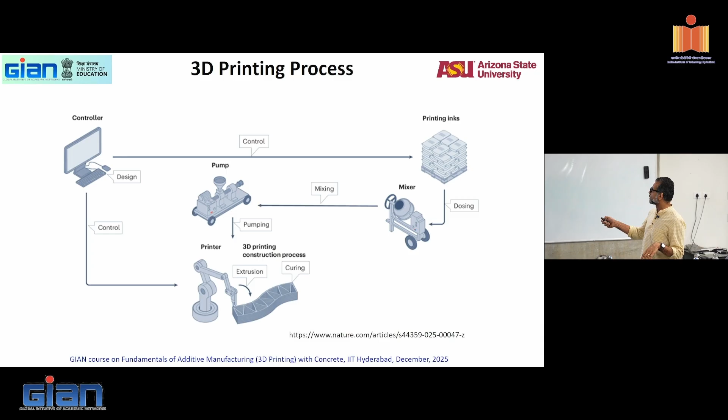We're going to do multiple things. Going back to printing, if you've forgotten what that is from yesterday: you have a pump that pumps the concrete into the printer, and then you print it in whatever shape you want, or you have a mixer and can directly put it in the printer. You can pump it whichever way using any of those materials. This is your basic process, and you can do all these different shapes, structural and otherwise.

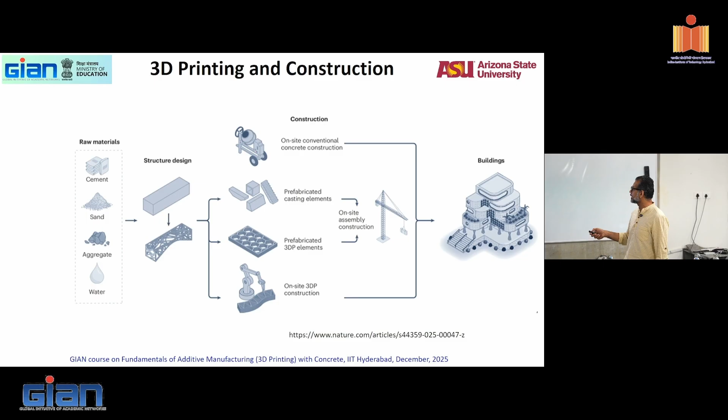So this is what we have in our plan of action. What do we need now? When you have a mixture that you need to print, and you're printing through a nozzle, continuously printing a large amount of material, you need to pump your concrete through a pump to the nozzle, correct? You have to get to the nozzle.

So your mix has to be pumpable. When the mix comes to the nozzle, it has to be extrudable through the nozzle, right? And once it is extruded, you have to be able to build it up, correct?

In your regular concrete, was it pumpable? Yeah, it's kind of pumpable. What do I do if it's not really pumpable the way I want? I add a little bit of admixture, a little bit of water, that's fine, I make it pumpable. It's not really flowing - what do I do? I get my vibrator, vibrate the whole thing. I just want to fill the form.

You have multiple levers that you can play. Your tolerances, your room for error, is much higher. Right now, you have zero room for error. You are playing this coordinated dance sequence, like the dance sequences where all the dancers do it together, otherwise it looks very ugly. Same thing - the pumpability dancer will have to coordinate with the extrudability dancer and the buildability dancer to effectively get what you want. And this has to be coordinated.

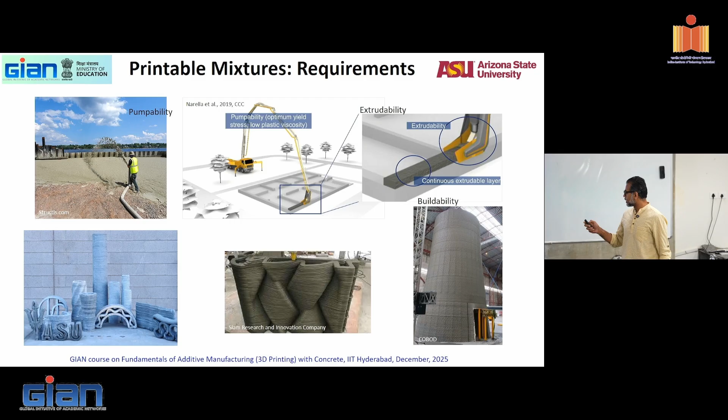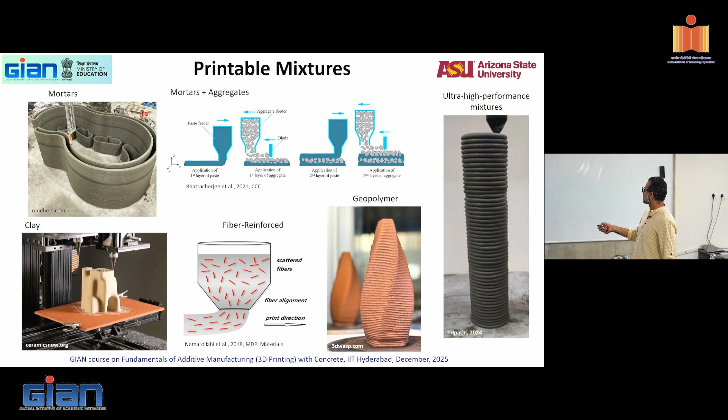Printable mixes, we talked about that - you need to be able to print them up and build it. I talked about mortars plus aggregates, the pre-placed aggregate concrete concept where you can build up things like this, all these shapes, in whatever fashion you want depending on what materials you have. So here are a few things connecting everything. Pay close attention to this slide - from whatever Dr. KBL told this morning, plus what we heard yesterday, a lot of things will come together in one slide, and we'll go in different directions as we go through it.

What we want is for things to be built up - eventually, that's your aim. If I want a 1 meter column, I need to be able to build that up. Here is your extrusion process, assuming you have a pumpable mix and have done all of that. You have an extrusion process, you want a certain viscosity, you know what the shear rate is - shear rate comes from pumping, and then the extrusion at the tip of the nozzle. You know what that value is, hopefully from a good estimate made in your laboratory experiments. Does that make sense? Is that idea clear to all of you?

Once having done that, what do I want - to get it built up in time. With time, I want the stiffness to increase, not the strength. Of course, as stiffness increases, strength increases too, but we don't want to characterize strength, because at early ages you can't calculate a strength. People will say, oh, this is a green strength - yeah, for lack of anything else, and strength is what we love so much. Yes, it's okay, but what we actually want is stiffness, because remember, in solid mechanics, there are only two fundamental material properties: stiffness and Poisson's ratio.

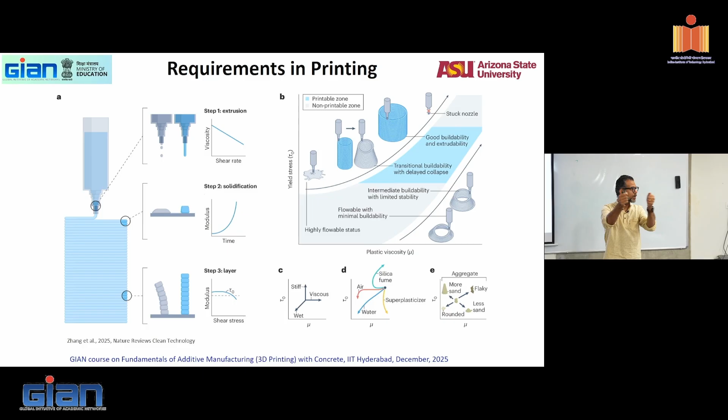By spreading these particles farther apart, what are they doing? These two cement paste particles are sitting like this. Superplasticizers, because of this phenomenon called steric hindrance - some of you would have heard in your classes - steric hindrance simply breaks this apart. They just go away, which means the contacts are broken. When the contacts are broken, yield stress comes down because you've broken the network. That's all you have done.

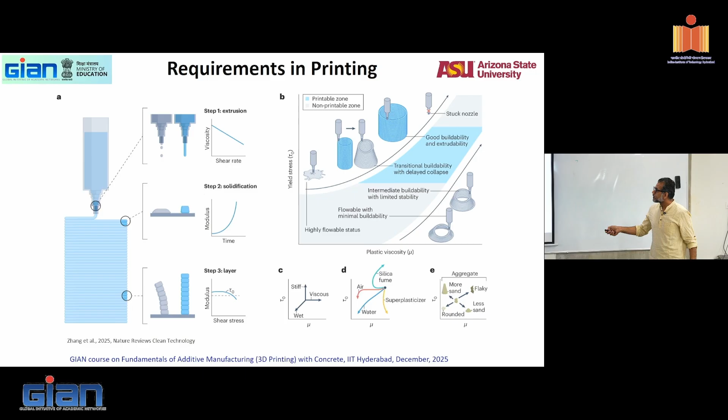Silica fume - now you add silica fume, what happens? Why am I doing this? For a certain dosage, you might see viscosity dropping a little bit. You will see the flow becoming easier because silica fume particles accelerate the flow at a very low dose of 1%, 2%. But when you get to 3, 4, 5%, they do the opposite effect - they start to collect these particles together and clump, and you will need more admixture. So depending on what you want with yield stress, you can play around with silica fume.

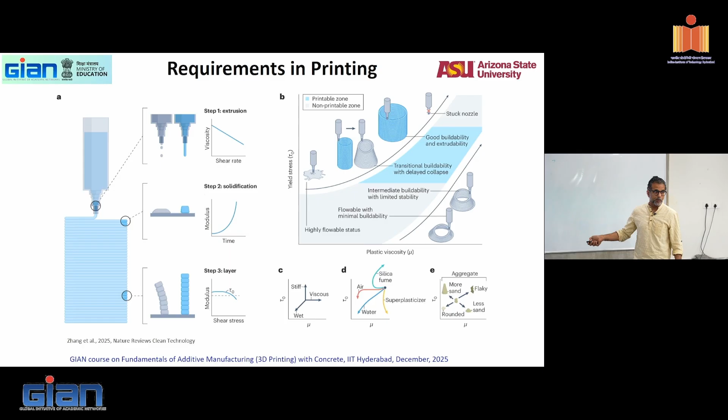Water, of course, you don't want to do this, but that's what water will do. You don't want to add extra water for all the reasons that you know.

And of course, aggregates, depending on what you have, does all of this.

So what is printability? Printability is extrudability plus buildability. You should be able to extrude through the nozzle and build up layer by layer. What do we need for that? Everything we talked about earlier: you need the paste to have the ideal yield stress and plastic viscosity. You need the aggregates, if you have them, to be spaced and particles packed in such a fashion that you give stiffness to the system, and then you should be able to print it and build it up well.

We talked about coating thickness when we talked about paste thickness. You can find the coating thickness based on simple fluid mechanics equations that use viscosity, density, particle sizes, and velocity of flow. You can find the ideal coating thickness for different applications. We'll work on that a little later.

Now, to get a good yield stress and plastic viscosity so the mix will flow, you want a certain amount of paste coating the aggregates, right? And that's what you heard in the morning. Your codes will do all of that empirically, by specifying the minimum cement content for workability and a minimum or maximum water cement ratio - they are simply specifying a certain paste volume. Depending on your aggregate sizes, you can find out, based on surface area, what the thickness of the paste is.

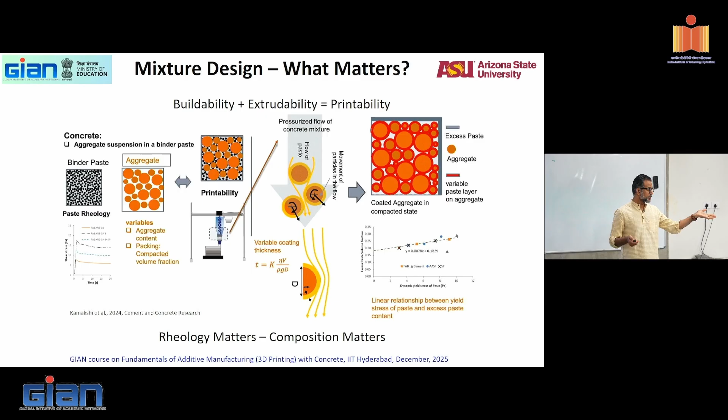So what you're doing is finding paste thickness, and here is a relationship between yield stress and the excess paste volume. As the excess paste volume increases, as you increase the dynamic yield stress of the paste, that is an indication that you have excess paste volume. So again, mix design will have to account for how much paste volume you have in excess of what you want to coat the surface of the aggregates. Because any excess paste is wasted opportunity, wasted resources, wasted money. So if you want mix optimization, that's what you do.

Okay, we talked about conflicting demands of stiffness and flowability. Again, stiffness or modulus - you want the modulus to be higher and developing fast so you can build up your layers and build the structure faster. One of the biggest advantages of 3D printing, if you look at people touting this technology, is that you can do very fast construction, correct? If you want fast construction, you better build things up fast. And if you want better buildability, you want the material to develop its stiffness faster - not while it's sitting in the mixer and the nozzle, but after it has come out of the extruder. So that's what you want. But in the extruder, you want better flowability so you can get a cohesive mix coming out.

So this one that you see here is good - this one, very good. It's very nice and pumpable. But what happens with buildability? Nothing. It's extrudable, it beautifully, nicely extrudes. You'll be very happy to extrude it. But then if somebody wants a specific shape, you'll say, whatever shape comes out is the shape you should buy. That's probably not going to work. This one is fairly good - you can do whatever you want.

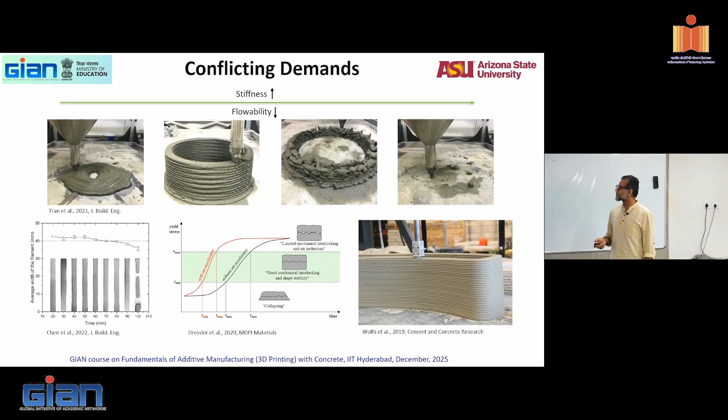This one, lots of people are putting in effort and struggling to get it out in some fashion. Finally, if you give the product something like this, of course you've lost your money. And this one, of course, it's not even extruding - it extrudes whenever the extruder thinks it wants to. You're not getting continuous extrusion. So you have the whole variety of this, and if this is what you want, this is probably that conflicting stiffness and flowability demand you want to satisfy.

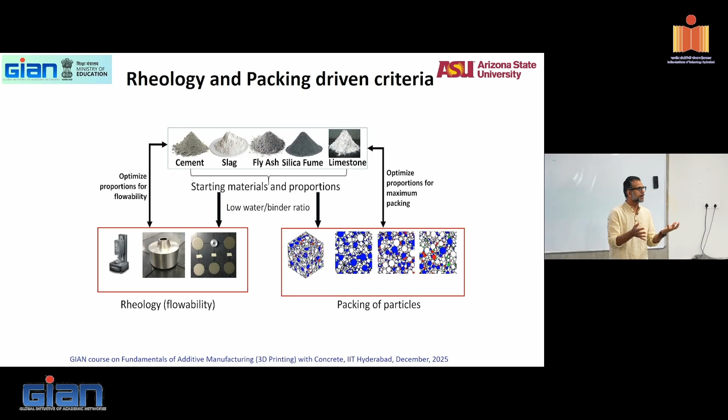Okay, so how does rheology and packing build into all of this? In the evening session today, we'll do a demonstration and you'll be able to play around with a few things. We'll do packing. The software isn't as complete as I'd have wanted, but it's in a shape where you can actually pack particles and visualize the packing. Avinay is going to give you data sheets with different size distributions that you can play around with and see how they pack. There are also calculations I'll show, which eventually these people have promised me they'll get this app working and running soon, and we will send it to you since all your emails are there.

We'll send it to you so that you can download it and play around and know all the particle packing characteristics. You can do all of that. Eventually, we hope we'll get you there.

So you have all these mixes, and all these materials have different size distributions. Cement, fly ash and limestone all have different particle size distributions. You can have different workability based on this. They'll have all different packing you can do. So you can optimize the proportions for maximum packing, optimize the proportions for the flowability and extrudability you want, and match these two requirements in some fashion.

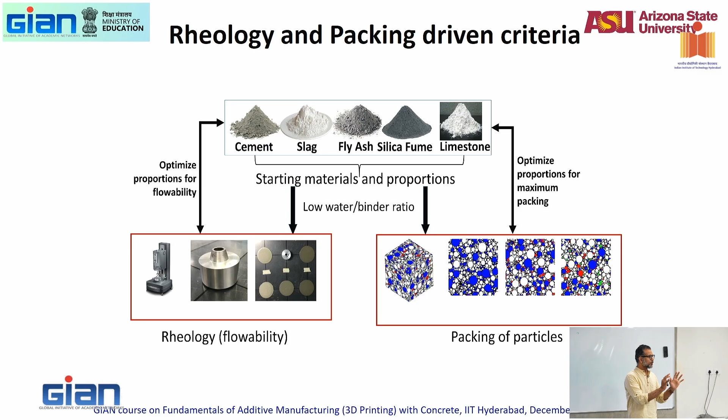We haven't really done it specifically for 3D printed mixes, but we have done it for UHPCs in a complete fashion and published to get rheology and packing based complete mixture design criteria, because UHPC's mixture design is more of a straightforward way of doing it compared to 3D printing, but the same principles will apply.

Now, binder type. If you want to start with packing, you talk about binders - what type of binders, right? So it'll be a good time to talk about binders you will use. Most of the time, your 3D printed concrete will have a high binder content - you're talking about 800 to 1,000 kilograms per meter cube of cement. Extremely high value. You don't really have to do that. You can drop it by 50% straight away. You can get to about 50% replacement of cement with some other materials if you know the way to control particle packing and rheology.

So a few things that'll be handy, and let's do some thought exercises here. I give you a bunch of different cement replacements. Let's assume you have all the cement replacement materials that you commonly have. And if I tell you, you can't change the water content in your mix, but I want the yield stress to be dropped - I want a lower yield stress, your water content has to be the same. I'm giving you cement, fly ash, silica fume, slag. What material will you use? Fly ash. Why?

Assuming that particle sizes are in the general range of cement, they're not extremely fine, not extremely coarse. Why fly ash? What will the shape do? Spherical shape, what will it do?

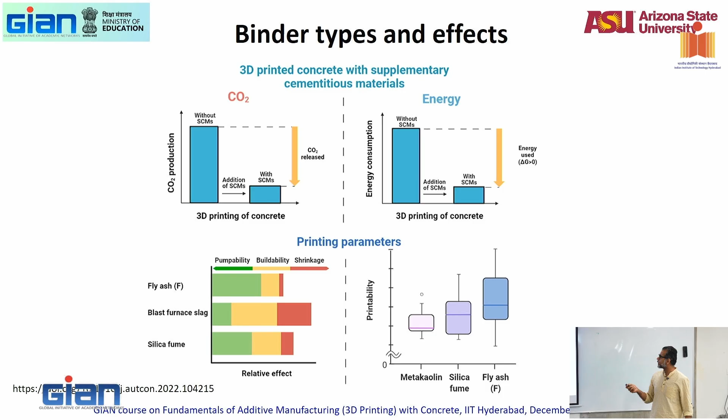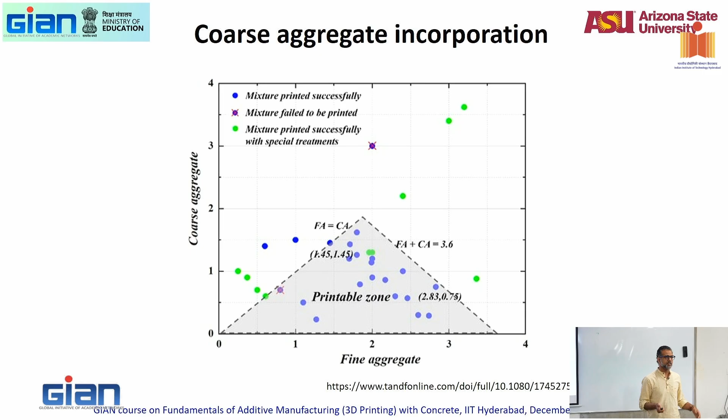So again, a few things to remember when you look at all those binder types. Now, coarse aggregate incorporation - you can incorporate coarse aggregates. When they say coarse aggregates, it's typically less than 10 millimeters. You're not talking about 1-inch aggregates, none of that - less than 9.5 mm aggregates. There's a certain zone in which you have a coarse to fine aggregate ratio that you can print, which is a function of your mix optimization, particle size, and all of that. You can look at that.

Now, if I'm really looking at particles, and this is more of a fundamental material science idea, what are the factors I have to look at when you pack particles? I'm sure you've seen in a basic material science class particle packing ideas - simple cube, body-centered cube, face-centered cube. A body-centered cube has a packing factor of 0.68. Face-centered cube has 0.74. Face-centered cube or hexagonal close packing, another form similar to face-centered cube, both have a packing ratio of 0.74, which means if I take a box and take same-size spheres and pack them in the form of hexagonal close packing or face-centered cube, I can pack 74% of the volume of the cube with these particles.

The remaining 26% will be empty. So if I have only spherical particles, which is what we idealize like you've seen in the morning, what do I need to increase my packing fraction? I need to add smaller particles. If you keep on adding smaller and smaller particles, you can get to 0.905 - that is the theoretical absolute maximum particle volume fraction you can get by packing these different size particles, but those are spherical particles.

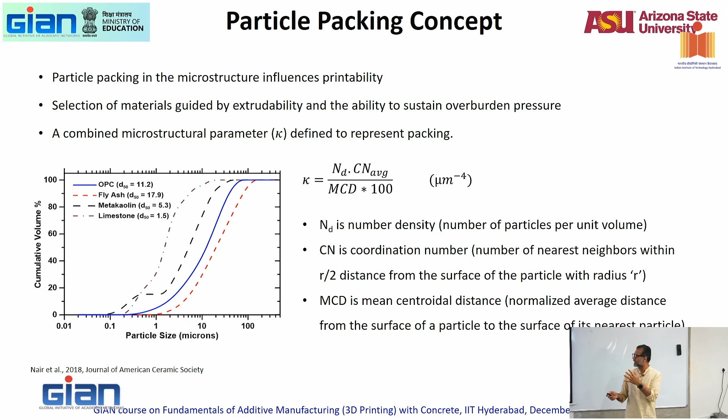So how do we distribute those particles? Mean centroidal distance is the distance from the surface of a particle to the surface of its nearest particle. Again, these are all mostly for hydration control, but we can use it for packing aspects as well.

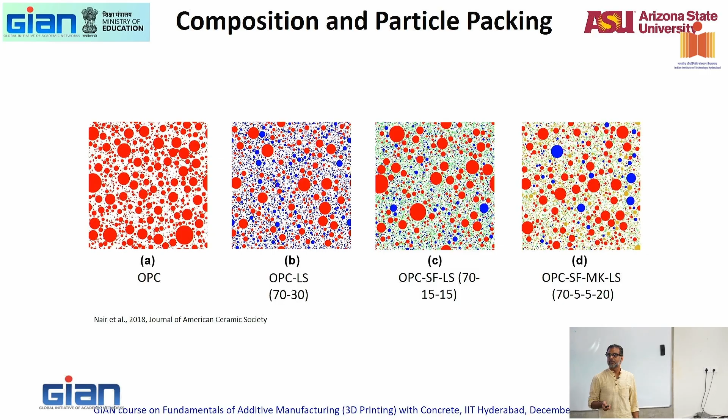It'll be cheaper, but think about 3D printing. When you're 3D printing a wall with extremely high exposed area with a large amount of cement, what are you going to get? Higher shrinkage cracking, correct? One of the most important problems with 3D printing is shrinkage cracking, which we will see later. So to control shrinkage cracking, your best possible option is to control the amount of cement, which means you have to fill it with some other particles, maintaining your extrudability and buildability at the same level.

And here is what's packing in a unit volume in 3 dimensions. You will see all of this in the evening, I hope.

Okay, now let's get to the aggregate story a little bit. And here is where I want you to understand this. You've seen this in the morning slide also. Here is packing density, here is the fraction of aggregates. Remember, in the morning presentation, what Shubhu showed, this graph was like this. You saw that?

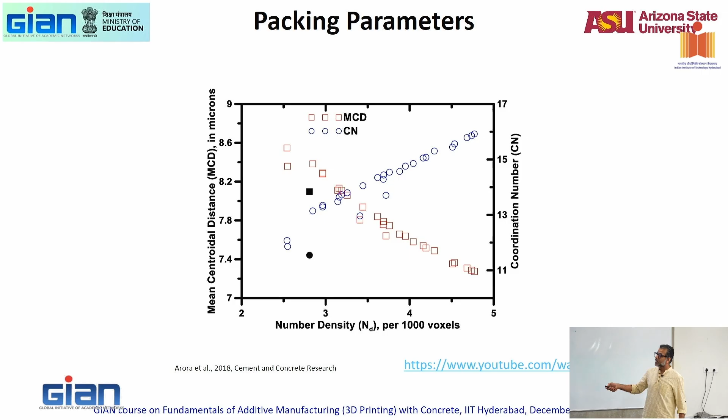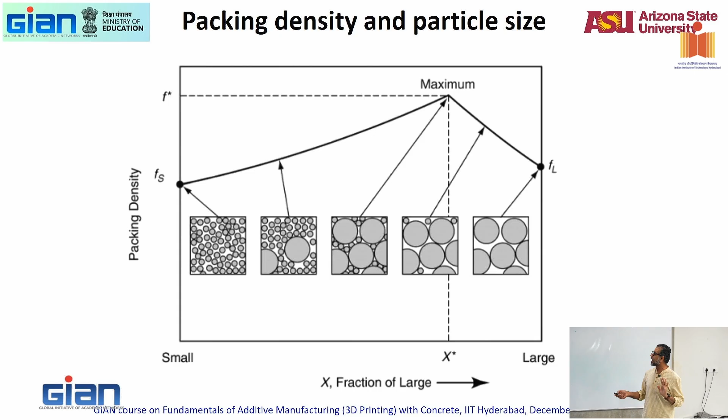This is packing density. What he was showing was a volume of voids, which is 1 minus packing density. So this graph was like this, and you said there was a minimum value where the voids are minimum. The same thing I'm saying, a minimum value where voids are minimum means there is a maximum value for packing density, for a certain combination of aggregates. How do you get that? That is the whole idea of doing packing.

Okay, so here are some packing parameters. We'll come back to that later. You've seen this picture earlier also in the morning, in a slightly different form.

So when I have all similar size particles with one particle trying to go in, it tries to loosen the system, right? If you try to put a certain amount of sand into aggregates, it's actually initially loosening it before you start to fill that back up. So there's something called the loosening effect, where a smaller particle goes in. This is the same thing that happens in crystals when you have defects.

It's called interstitial defects. For example, if you make steel from iron and carbon - carbon is an interstitial defect that goes into the crystal structure of iron and changes the crystal structure of iron. If you remember your steel phase diagram, you'll know that pure iron at room temperature has a body-centered cubic crystal structure.

If you simply heat pure iron to close to 900 degrees Celsius, BCC changes to an FCC structure. Simply by heating, your crystal structure changes. FCC has a higher packing than BCC. Now you heat even further, the atoms and particles rearrange, reorganize, and you get back a BCC structure, right? So lots of these metals do that through temperature changes.

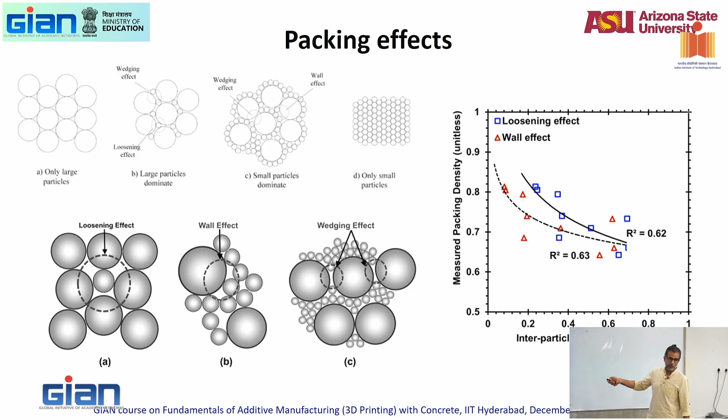As a function of interparticle interaction, loosening effect and wall effect create a reduction in particle density or packing density. This is what happens - again, these are all simulated values that we have done.

Remember this picture from yesterday? How does this relate now? This was viscosity as a function of volume fraction and sizes. Yesterday I told you we'd get back here when we talk about packing. So here it is as a function of sizes.

Smaller spheres give you larger viscosity. Larger spheres give you larger viscosity. Somewhere in the middle, you have lower viscosity, faster, easier flow. So it's not just one size that does it, it's a combination of sizes.

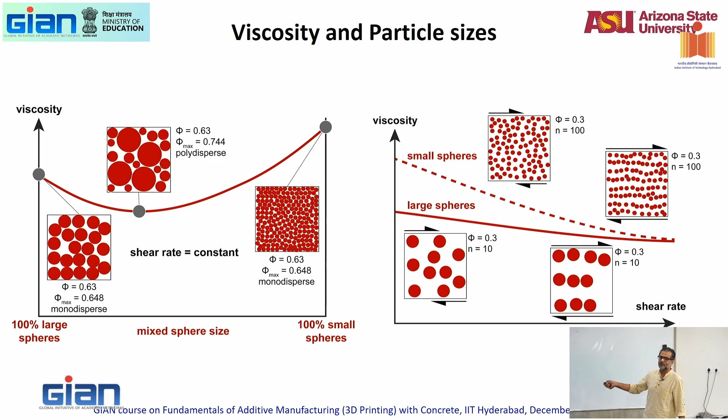Again, here we saw that when you increase the shear rate, you kind of take away the particle effect. I'll come back to this later. So I'll do this compressible packing model, very similar to the packing you heard about this morning. We are going to throw in a little bit more mathematics into it.

There are several different models for packing. You can have monodisperse, polydisperse. You can have packing based only on packing densities, or packing based on size and density - so many different varieties. But this is one kind of packing model that is computationally easier to implement.

That's why I do it, so that when I give you the app finally for particle packing, it'll have this model. What it does is take into account what's called a compaction index - a scalar number which depends on the size distribution of aggregates that facilitates better packing, and the effort involved in packing. Right now, packing particles doesn't come free, it comes at the expense of energy.

If you want to pack something more into a system, you have to give it energy, correct? You have to vibrate it, rod it, compact it - something. Just taking a bunch of particles and putting them in a volume, will it compact well? You have to vibrate it and let it go into the right spaces to fill it, correct? Same thing with concrete - you vibrate your concrete to get better density. So you need to provide energy. This K is an indication of both the distribution of particle sizes and the energy that you give.

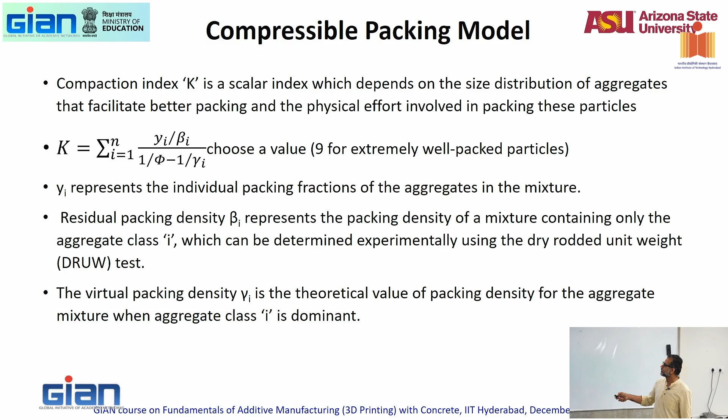And then you can use an optimization method, a Newton-Raphson method, for example, for those who have done a numerical methods class. You can use that to optimize and find the value of phi based on this. And then if you have fibers in it, your fibers will also perturb the volume. Fibers are long, they'll also try to move the materials farther apart. You can account for the perturbation volume. All of it said and done.

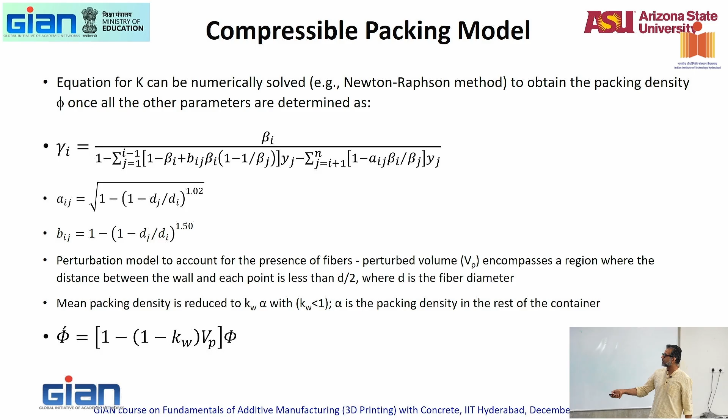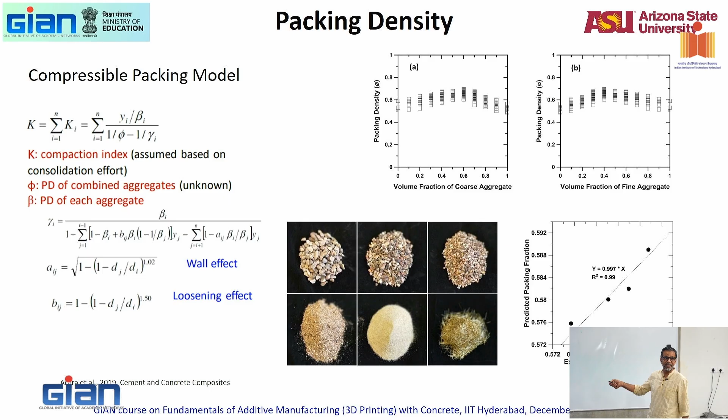Here, if I'm using these different aggregate sizes, 1, 2, 3, 4 different aggregates, sand, fibers, all of that, here is your simulated model. I'll eventually give you, I promise, in the next month, the software that will do all of this for you free. So this is taking the volume fraction of coarse aggregates and doing whatever fraction of, this is about 800 simulations of so many different combinations. No experiments, simply your software will do it.

And then I will do the theoretical packing density. You see, at about 0.6 volume fraction of coarse aggregate, I get my maximum packing density of aggregates, about 0.72 or so, which means I can make a system with 28% paste. That's your minimum paste content to pack the system. Similarly, for a different size distribution, my maximum volume fraction slightly changes. And then my experimental versus predicted shows that my model is good.

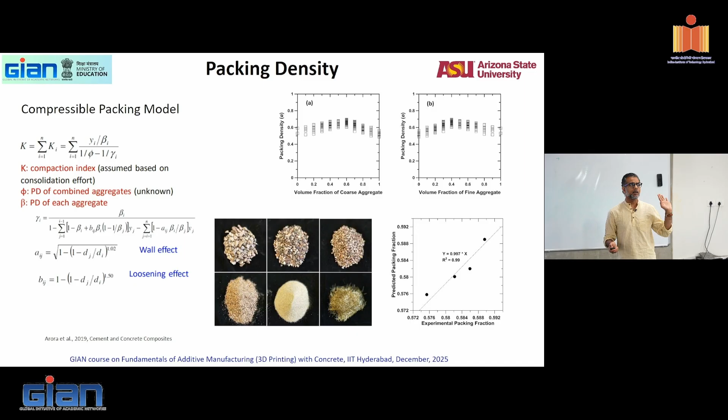So this is your packing density calculation using what's called the compressible packing model, exactly based on theory of how particles pack. And if I do some examples based on 3 different sizes, a fine, intermediate, and coarse aggregates, increasing packing density from 0.65 to 0.82. What does this point to? Among these, do you think which one will have a 0.82? Fine, intermediate, or coarse? Which one will have it?

Don't try to say an answer quickly. No answer is also a good answer sometimes - the idea is to identify at what point there's no answer. Among these values, 0.65 and 0.82, can I tell which is which? I don't know any other information, so I say coarse, intermediate, fine - one is very coarse, one is very fine, the other is in between. I can't say which is which, it could be either one. How many sieve ranges have I covered in the intermediate, correct?

Now likely you can make an educated guess and say this 0.82 consists of a larger size range - that you can say, correct? Because if it's only one size, I should be closer to 0.74, because I have a higher value that I experimentally determined. You can simply tell the guy he's wrong, but telling somebody he's wrong without proof is also not a good thing. But then you can say maybe that range has larger sizes included.

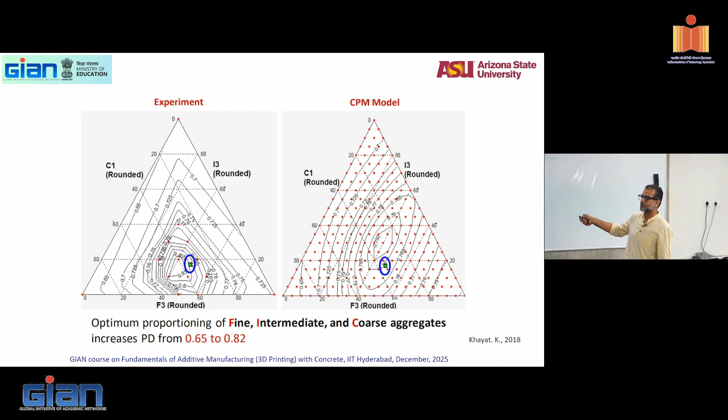You get the idea? So between 0.65 and 0.82, and I do a lot of simulations, a lot of experiments here, and I say that's my optimal value, which is 0.7... 0.80785 or something, and then 0.79 is what I get using the compressible packing model. So the model actually does pretty well for lots of different things.

All right, so that's the idea of particle packing, which we will come back to again when we talk about extrudability and buildability.

So continuing from where we left off, we're talking about packing effects, how that affects rheological properties, and how eventually - we haven't seen that yet - but how eventually we will see how all of this affects extrudability and buildability, which is basically your printability criteria.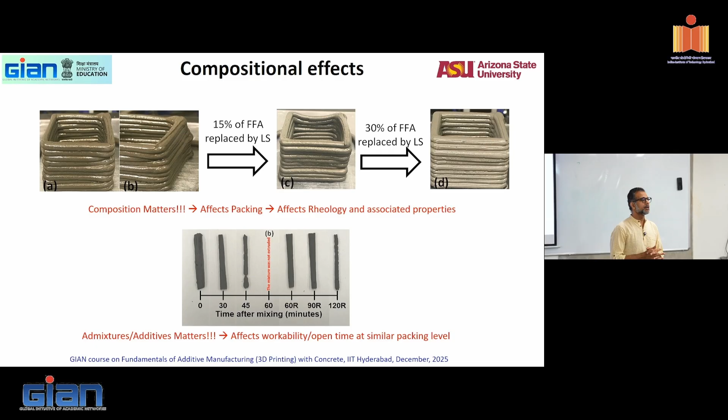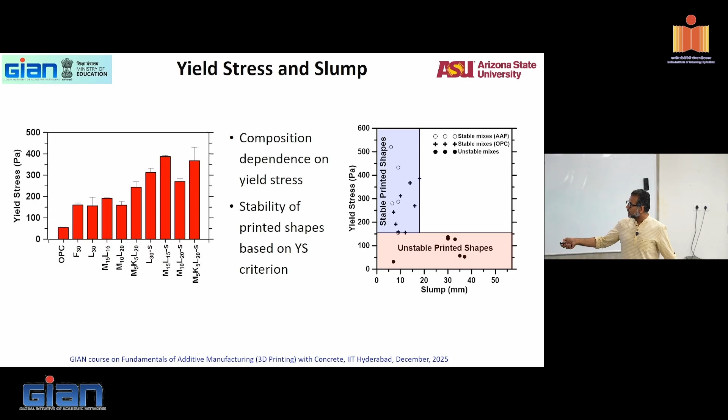Yield stress and slump, you heard this in the morning. Yield stress is an indicator, or slump is an indicator of yield stress. So for different materials, if you look at yield stress as you add more and more materials - many of the concepts we talked about, you can see here. If I add 30% limestone and replace cement with that, and limestone is much finer than cement, my yield stress increases. Why? The number of particle contacts have gone up.

As I go with smaller and smaller sizes, the number of particle contacts goes up, yield stress goes up. Similarly, everything on the right side of OPC here are systems where cement has been replaced with particles of smaller sizes. And then with metakaolin, you'll see the yield stress really going up. Why? Not just particle size effect, but also the effect of clay, which has the ability to hold onto the water and not allow water to the rest of the mix, so it becomes much stiffer. So with metakaolin, that's what you see.

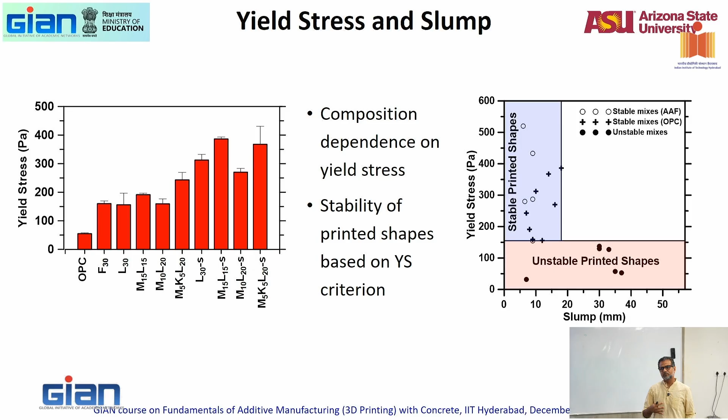With all these mixes, it's simply the effect of more number of particles, more particle contacts, more energy required to break the flocs, more stress required to break the flocs - that's what you're seeing. And then if you use yield stress as a very quick measure, and slump as a very quick measure of whether you can print or not, this is what you get. At very low yield stresses, you really can't print. But at lower slump values and higher yield stress, you get some stable printed shapes. Again, it's a trial and error way that you can get it, and you can relate yield stress to slump.

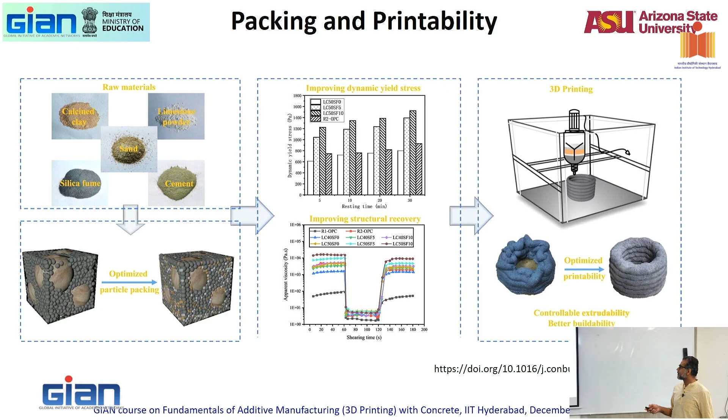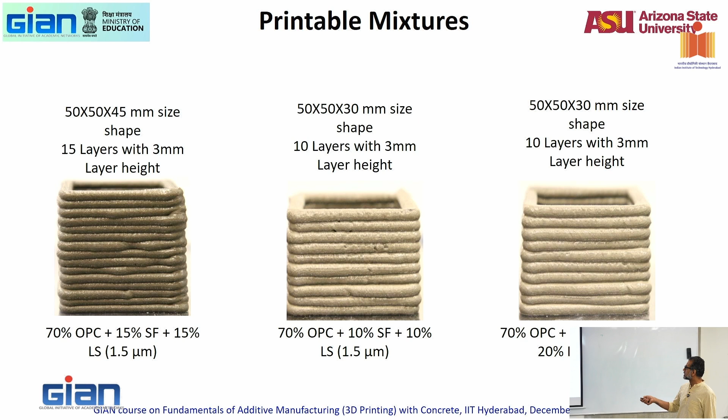Packing and printability, going back to the same idea - how do we now start to quantify packing and printability effects? So here are a few printable mixes, again the idea being OPC with some replacement materials to get better buildability, better shape stability, and all of that. There are now 3D printing systems called 2K systems. So 1K system is basically your pump and one extruder.

You extrude that one material. Now we have 2K systems that allow addition of accelerators or other admixtures just before the nozzle. Why do you need that? You want the material to be extrudable, so you want a low enough yield stress. But then you add an accelerating admixture at the tip of the extruder nozzle so that when it comes out, it quickly becomes buildable. The yield stress goes up because the accelerator speeds up cement hydration.

Remember, if I have two particles with cement grains in between, one way to increase yield stress is to accelerate hydration and form more hydrated products, replacing the water with hydrated products. For any unit volume of cement, after complete hydration you get roughly twice the volume. It's not hydrating completely here, but you see how the volume increases. That increased volume fills up the space, increases stiffness, and helps the material hold its shape much better. That's the benefit of adding an accelerator at the tip of the nozzle just before it comes out.

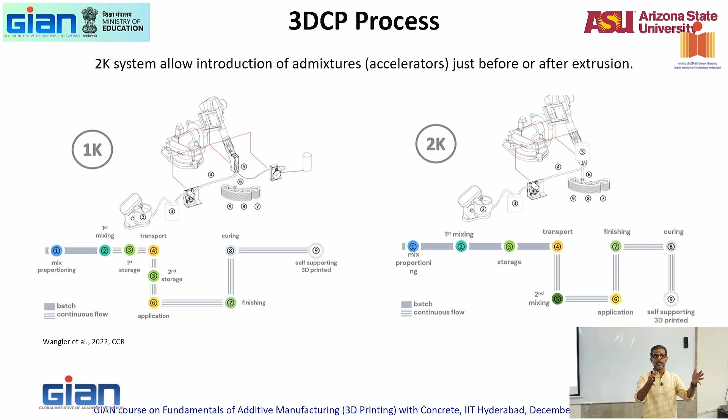You don't want to do it ahead of time. You don't want to do it while the material is within the extruder, because it'll get stuck in the extruder.

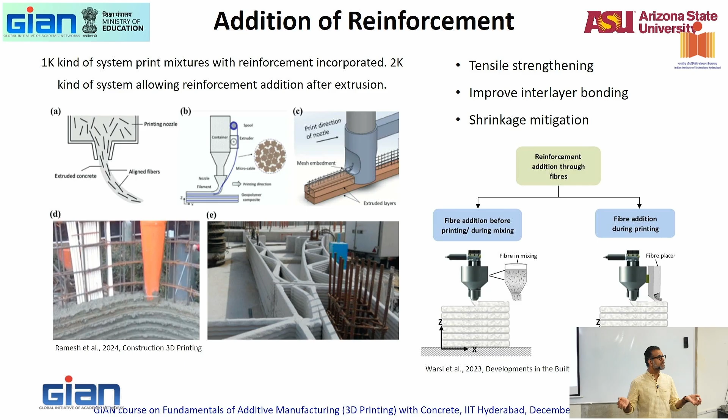Addition of reinforcement: material design for 3D printing has a lot to do with fiber reinforcement, not because we can't print without fibers - we absolutely can - but because we have no other really credible way of reinforcing this material. So is there a better way to build in some tensile strength to the printed material? That's why fibers are added.

If you look at a random shape of fibers added, as the material goes through, you see these fibers aligning along the direction of printing. So when you print a layer, you'll have short fibers aligned along the direction of printing.

Like we talked about yesterday, you're now getting an anisotropic composite material. The concrete does not have the same properties in all directions - depending on the direction of testing, your properties will be different. Not much difference in the compressive property with fibers, but with respect to tensile and flexural properties, which is something we need to think about.

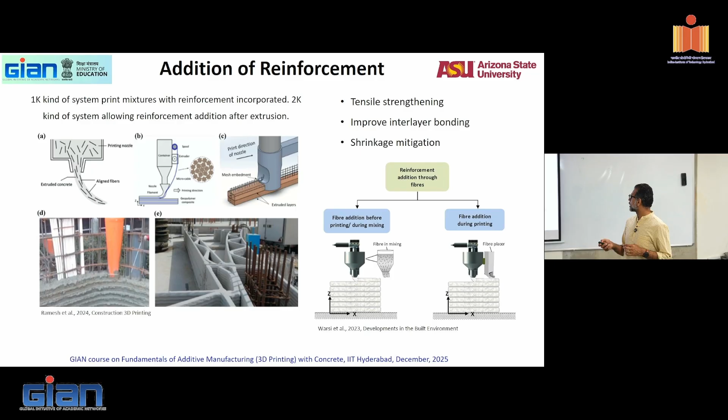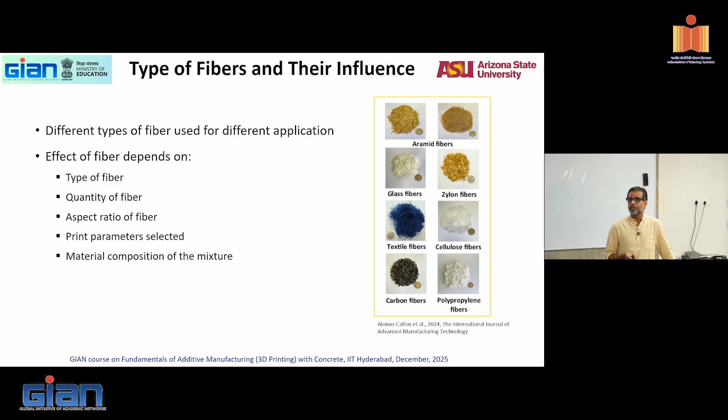There are many types of fibers you can use: aramid, glass, textile, cellulose, polypropylene, and more. The effect depends on the type of fiber, quantity of fiber, aspect ratio - which is length to the least lateral dimension of the fiber - the print parameters selected, such as how quickly you're printing and how many layers, and the material composition. We'll see more of this when we talk about mechanical properties, but fibers definitely influence the properties.

In the fresh state, fibers influence workability - all of you know that. When you add fibers, workability is influenced: it changes yield stress, cohesiveness, shrinkage, cracking, and surface finish. And if you have an improper mix design, you'll have settling of fibers, improper bond, or stiff mixtures where you simply can't print.

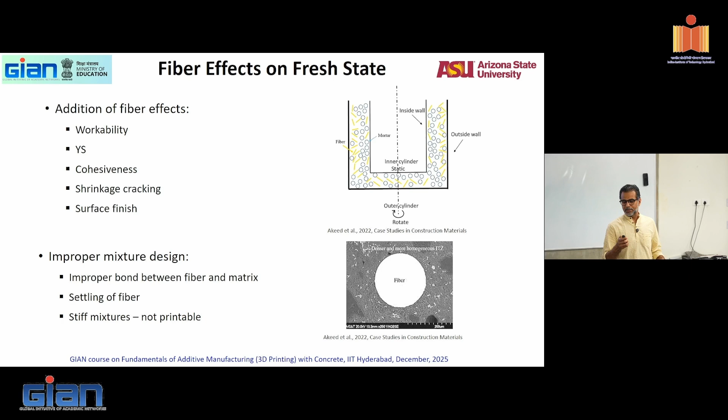Printing fiber reinforced mixes - just to give you a few examples. Remember the wall effect you saw with aggregates, where things get stuck onto the wall and create a different packing closer to the wall? Same thing happens here: you'll have fibers near the wall, and in between you'll have fibers randomly aligned, depending on the size and the effect.

As the material comes through the nozzle, if the fiber dimension is close to the size of the nozzle, you'll have aligned fibers. If the fiber is extremely small compared to the nozzle size, you'll still get random orientation. In regular concrete, when you throw in fibers, you rely on random orientation - you expect the fibers to be randomly oriented so the concrete gets properties equally in all three directions.

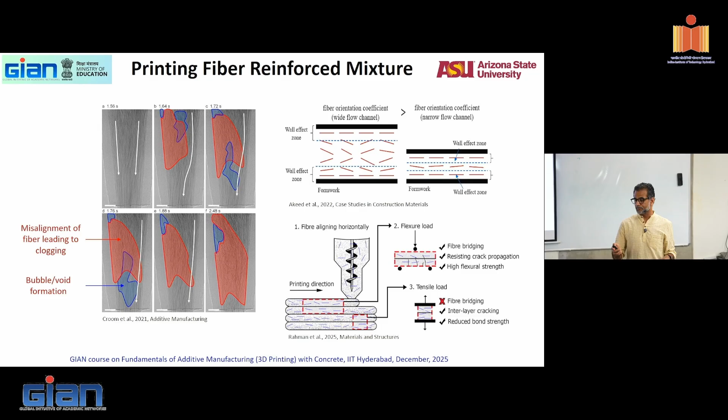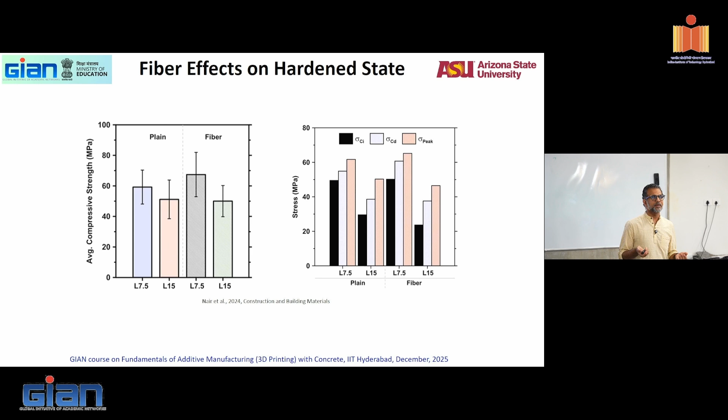So here are some examples of fiber effects on the hardened state - compressive strength, flexural strength, plain versus fiber reinforced. In compression, fibers really don't do much at small volumes. At very high volumes, as in UHPCs (ultra high performance concretes), where up to 3% by volume of fibers are used, you start to see an increase in strength. At about 0.3%, you'll see almost no effect in compression, but you will see effects in tension and flexure.

Steel fibers have better tensile properties, so they'll be better. If you want crack reduction or load control, polypropylene is perhaps good. Aramid fibers are also very good, very stiff fibers, but they're much more expensive. Steel is perhaps the best and most commonly used.

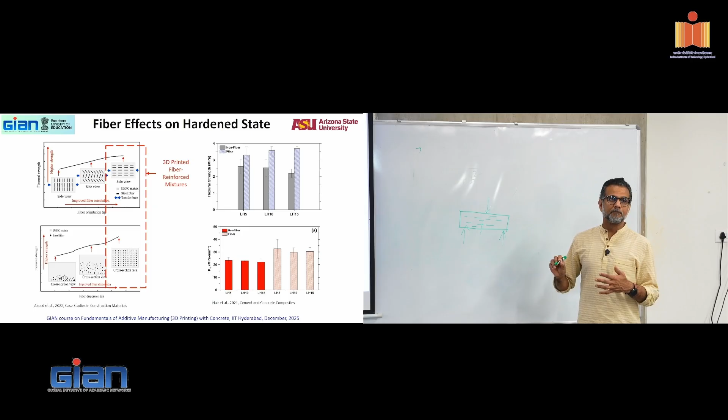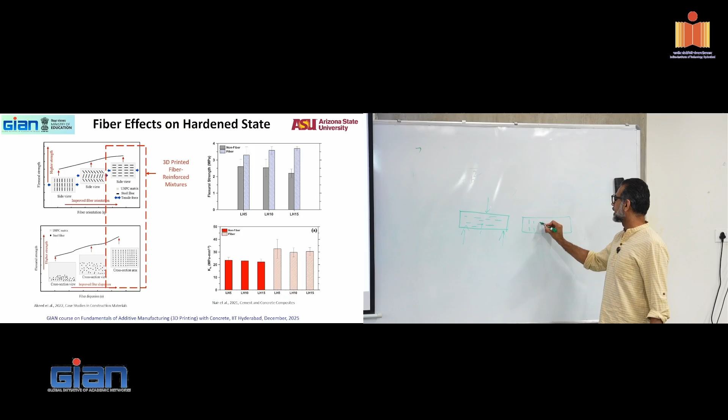So for flexure, if you have a beam that you're testing, and if your fibers are all aligned in this direction, a crack going in this direction will find a fiber, and you'll see all the effects associated with fibers: crack bridging, crack deflection, and therefore the toughness and flexural strength will increase. Whereas if you print it so that fibers are aligned like this, a crack can go right through, and you might not see any influence of fibers at all.

If you have normal casting of concrete, you expect the fibers to be in all different orientations, which means statistically there's a chance of finding a fiber everywhere, and that's why the properties are increased. In this case, the properties are much more increased because you're absolutely certain to find a fiber on the crack path if fibers are aligned in that direction.

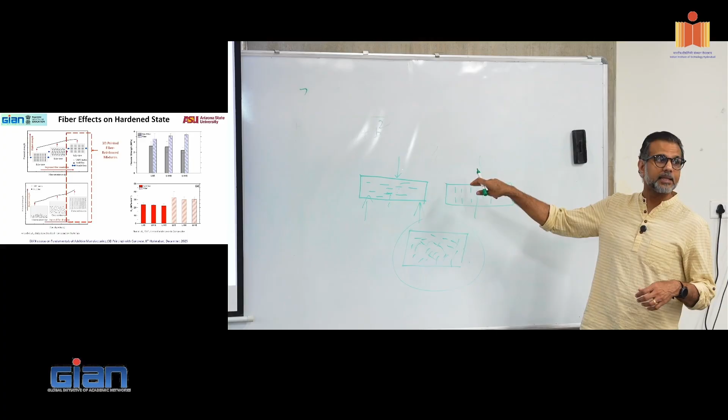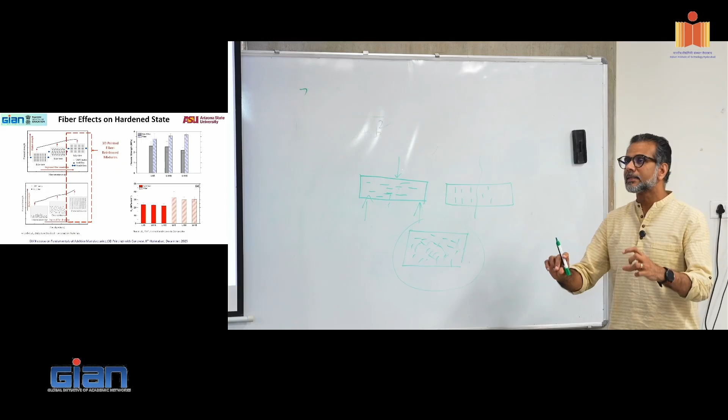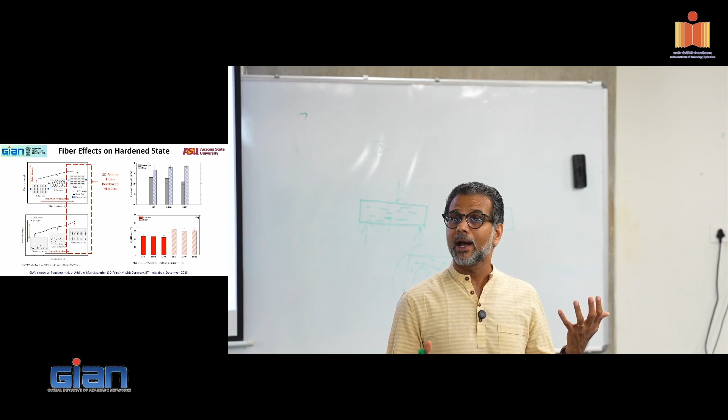So everybody gets the difference, right? Printing direction matters - how you print, what direction you print, matters with respect to testing. Now if you print a slab and cut a piece of beam to test, the direction of testing matters. So when you say you got so and so flexural strength using fibers in your 3D printed mixture, you have to specify absolutely what was the direction of testing.

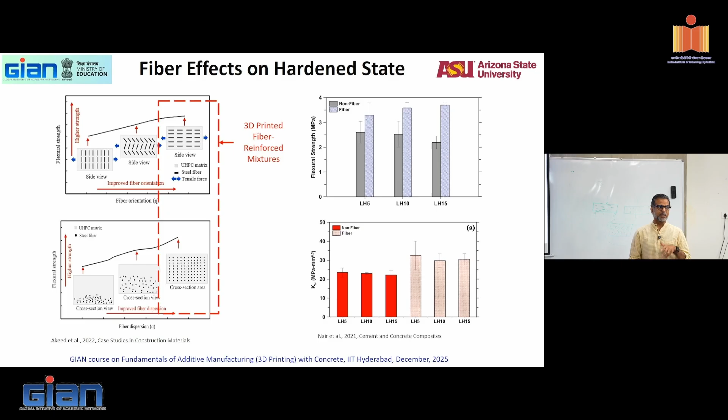Because you're dealing with an anisotropic composite. Anyone who has taken continuum mechanics or stress analysis will know that your stress tensor will have 9 components - we simplify to 3. If you have x, y, z directions and sigma 1, sigma 2, sigma 3, now you'll have components 1-1, 1-2, 1-3, 2-1, 2-2, and so on - all 9 components. Make sure that's accounted for. You can remove a few because they'll be similar, but generally it's what's called an anisotropic composite.

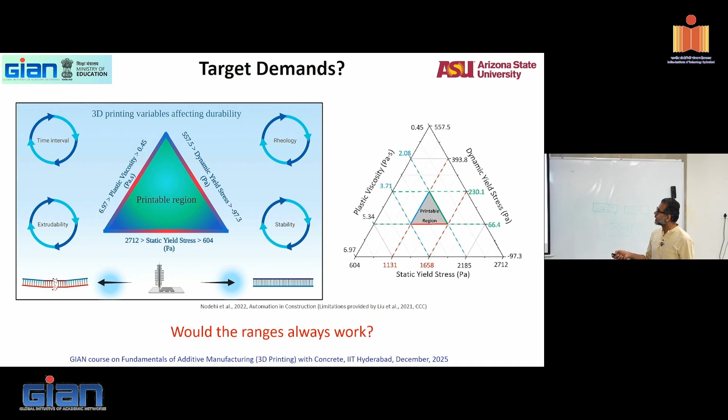Target demands in what we want - things we've talked about earlier: rheology is important, extrudability, stability - how much time, viscosity, static yield stress, dynamic yield stress - all of those will have to be accounted for in some fashion. Will we be able to account for everything all the time? No. But like every good optimization, you should get 2 of the 3 correct. One of the 3 probably won't work, but none of the 3 absolutely is a disaster. At least 2 of the 3 parameters you want should work, and you should be able to pick up which one you want.

So looking at a simple conceptual diagram - right now you know only about yield stress and viscosity, that's the rheology you know: static yield stress, dynamic yield stress, viscosity. What is that printable region in which this works? This will in turn help you find the mix that satisfies these given criteria.

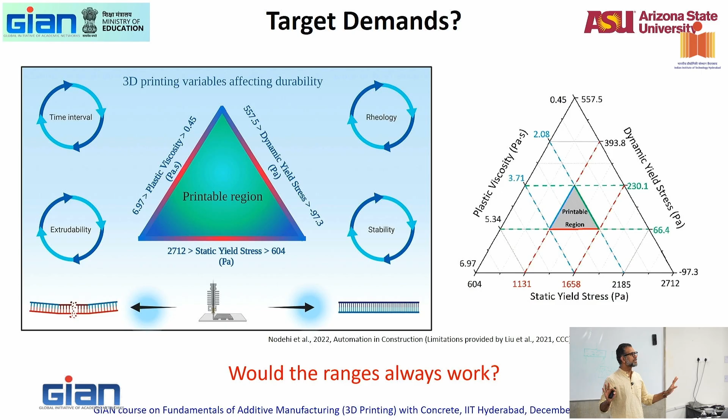So if you are doing 3D printing, like many ready mix companies, if you ask for an M30 mix, they will have a standard M30 mix ready. When you go and ask for M30 concrete, the guy isn't sitting there proportioning it on the spot - they have an M30 concrete ready based on the cement they use, the aggregate sources they have, all the conditions - optimized and ready to go.

So next time you go for M30 concrete, they'll have it. They'll have M35, M40. Only time they may have to design a new one is when you ask for an M100, because nobody asks for it regularly.

Similarly, if you are printing concrete regularly—if you want to print a complete house or building—you will have that mix ready, and this is a good place to select what that mix would be. Of course, you would tweak accordingly. Today is 40 degrees, tomorrow is 30 degrees, you adjust the parameters accordingly. As a concrete engineer, you would know how to do that, right?

The admixture dosages, the cementitious content—you adjust things a little bit here and there, but you have some kind of standard recipe. Like restaurants, right? When you order, they don't really have 200 things in the menu. They have a bunch of standard things that they mix. Similarly, as an engineer, you have some standard things, based on what parameters you choose to control and what parameters you choose to test regularly.

The reason why viscosity and yield stress are easy is because you can test for them regularly, quickly, and have a database. Quality control is all about having data. It's not about doing something today that came out well and just going with it—no, it's about keeping the data and being consistent in how you do it. These measurements help you consistently make those mixes.

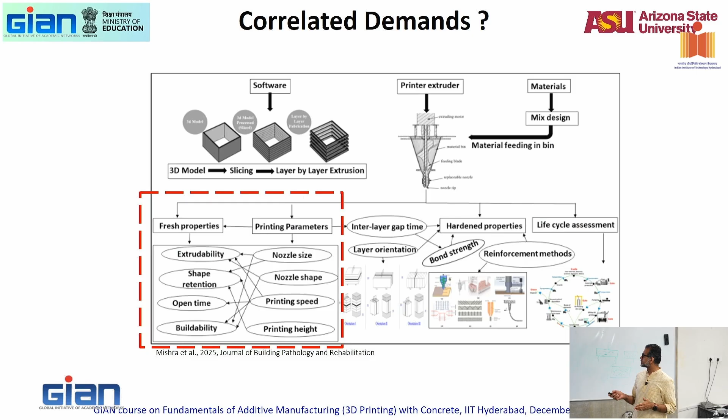Yes? If we're looking at these three parameters, are we basically looking at buildability and extrudability? No. What you've done is, I've created a mix, characterized it, printed it, printed a few combinations, and found these combinations to be good enough to print.

Because my materials aren't changing, I'm saying this plastic viscosity, this yield stress, this dynamic yield stress is good enough to keep as a baseline. That's my starting point. From there, you may tweak, you may do different things to improve, but that's your starting point. I may only get 1.5 meters of buildability. To get 2.5, what do I do? I have a starting point now from which I change to get my different buildability.

But we have something to learn from conventional concrete, where we evolved a design process and ultimately designed concrete based on functionality. Correct, so can't we learn from that? And I don't know if there's any round robin exercise going on—I just want to know.

So there are round robin exercises going on, but not much on the workability side, because all printing depends not just on the material but on the printer too. So when you do a round robin, how do you really standardize everything? The Cobod printer is different from an ICON printer, is different from somebody else's printer. So what they do is use generic terms like plastic viscosity and yield stress, which you can quantify.

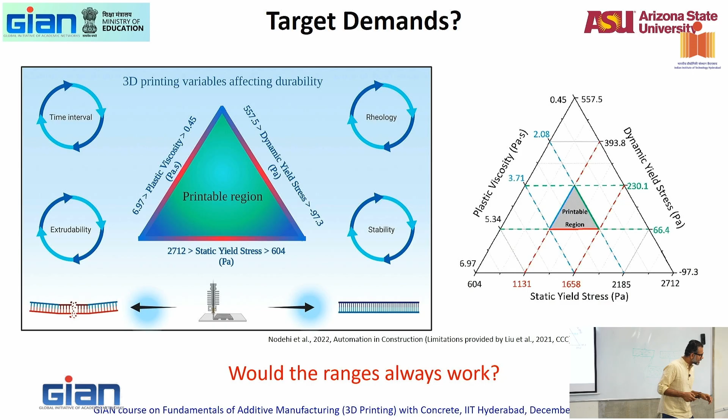So that's the whole idea. We'll stop now. I think this is almost done. I probably have connections with all of this. We'll start with this again, going back to the same thing, answering many of your questions here. We'll come back after lunch and probably finish this up. Any questions? Any clarifications?

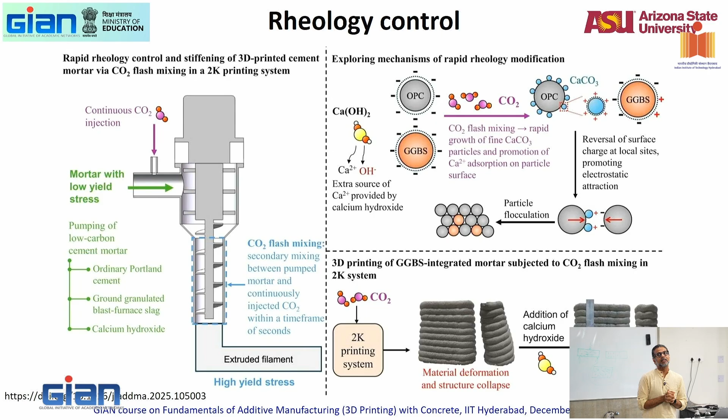The yield stress that you mentioned, again it depends on the type of technique, like measurement patterns. Yes, yeah, it depends on whether you're measuring with a parallel plate or a cone. But the key is that's why the protocols you talked about yesterday - you have to have those protocols lined up and be able to say the yield stress I measured using this technique under these conditions corresponds to whatever it is. It has to be right, otherwise, what are we trying to do? We are trying to reduce the number of trials and errors, and we are trying to make sure that scientifically what we are doing is correct so that we can translate it as fast as possible. If you don't have those protocols lined up and if those are not correct, you may have to do extra tests to do all of that.